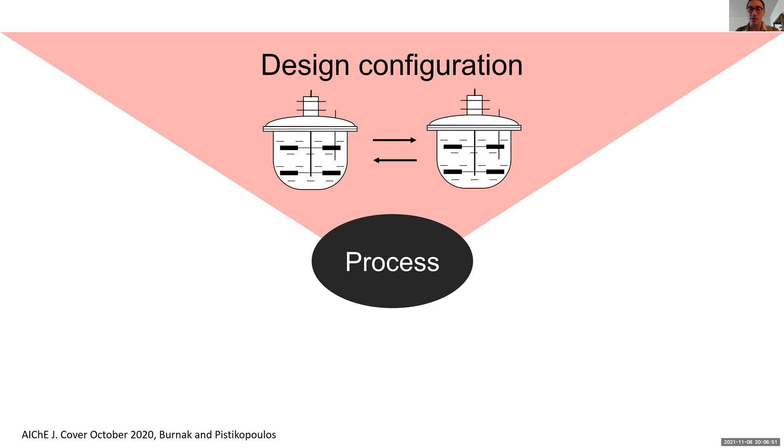So here we go. As I mentioned, most of my PhD studies revolved around processes, and of course any process will first start with the design configuration problem. By design, it will include the processing unit design and also the process flowsheet design—these are all part of the design configuration problem. When we do these designs, we want our process to be able to deliver the product specifications that we desire, and by doing that, we want it to be economically feasible, safe, and environmentally friendly.

Once we configure our design, the next step is to be able to operate it in an optimal fashion, and that is under the umbrella of optimal control. Most of us would know the more classical PID type of controller, but if we also need to handle more advanced constrained problems for optimal control, then we consider the optimal control problem, which chemical engineers are also highly engaged in within this domain.

Lastly, I also considered the scheduling problem, the process scheduling problem, in my PhD, which is not necessarily a traditional chemical engineering problem, but in recent years more and more chemical engineers are engaged in it. What I mean by scheduling is that let's say you have multiple tasks that can be delivered in multiple units—like multiple reactions, reaction 1 and 2, and multiple reactors. Allocating these reactions to the right reactor and sequencing these different reactions, along with timing—all these decisions fall under the scheduling problem.

Optimizing the schedule can also improve the efficiency of our problem, meaning we will be able to reduce our operating costs. Conventionally, we are all trained to isolate these problems, structuring them in a more hierarchical way. What I mean by that is we first build our design.

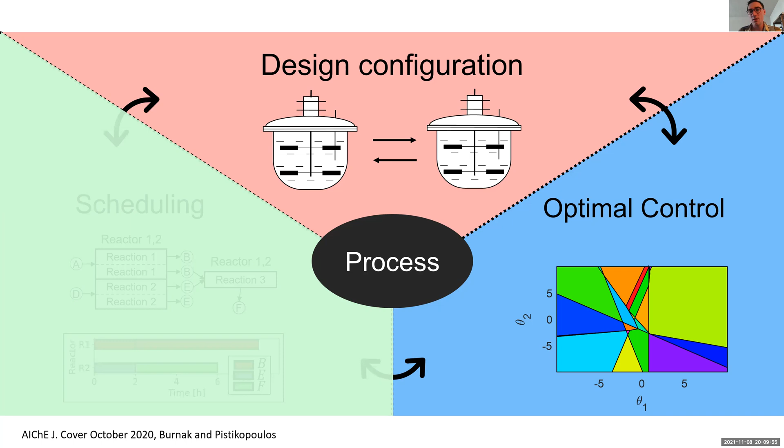And that was at the core of my PhD studies. Throughout my PhD, I focused on merging all of these decisions under a single optimization formulation. Today, I'm going to mostly focus on the integrated design and control problem, because I think it's more engaging for the audience, and I hope you will be able to follow that more easily.

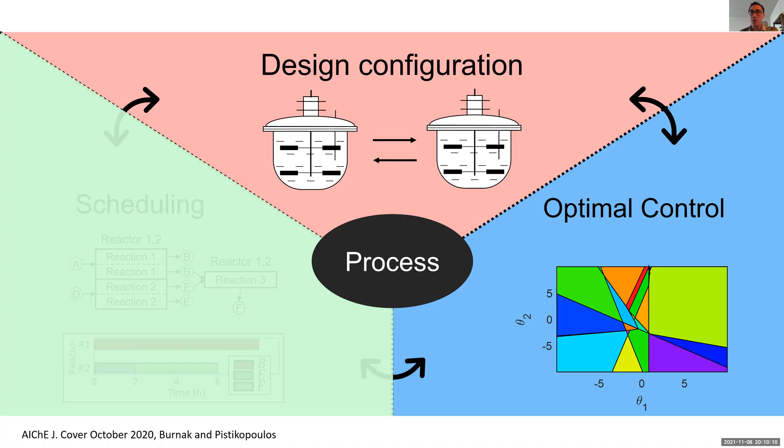This problem is not some unique problem that we came up with, or that either me or my advisor came up with. It has been studied in literature for close to almost half a century now, and it first started with investigating the steady state flexibility problem—what is the maximum external disturbance we can have in our process without any significant disruptions. That is the steady state flexibility problem.

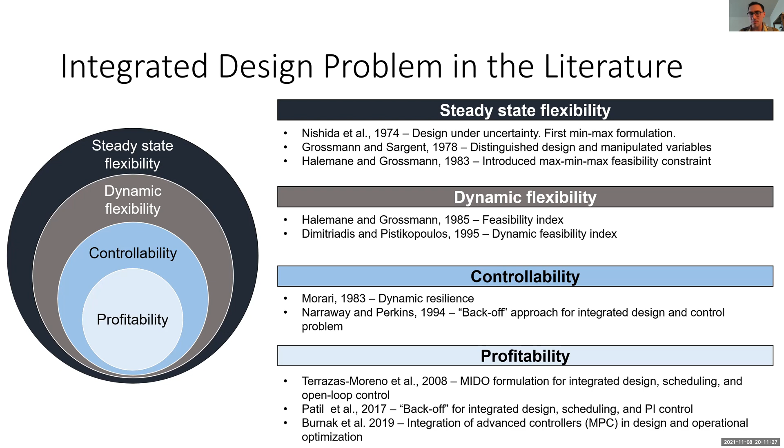Then the next step was the dynamic flexibility problem, which asks how we can transition from operating point A to operating point B in a more optimal fashion. Then the controllability problem: when we have these transition profiles, is that going to actually be doable by our controllers? And more recently, as our modeling and optimization tools improved, how can we do this in the most economically profitable fashion? So this is a brief summary of the literature.

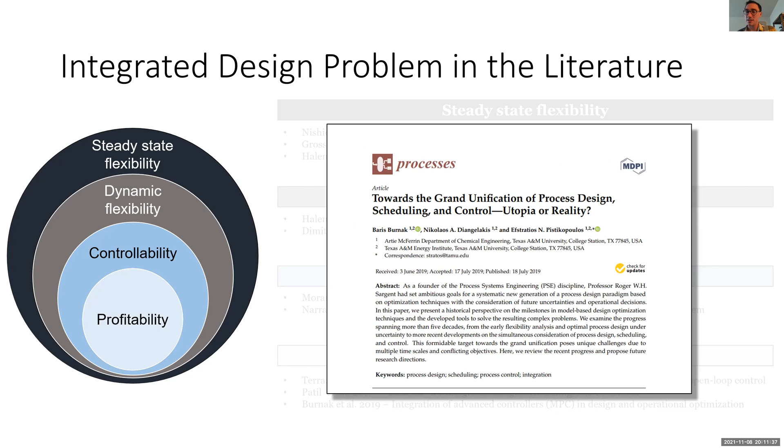About two years ago, we published a paper on this, and if you're interested, I can share this paper with you. Hopefully this gives you an idea of the problem that I researched.

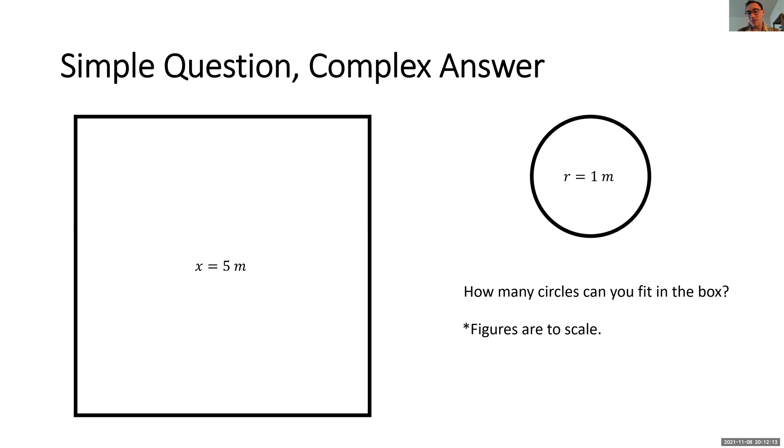Now I'm going to briefly talk about the more modern mathematical optimization tools. I would first like to motivate you with a very simple question, which can be very complicated to answer. If you were to ask how many circles you can fit in this box, how would you approach this problem?

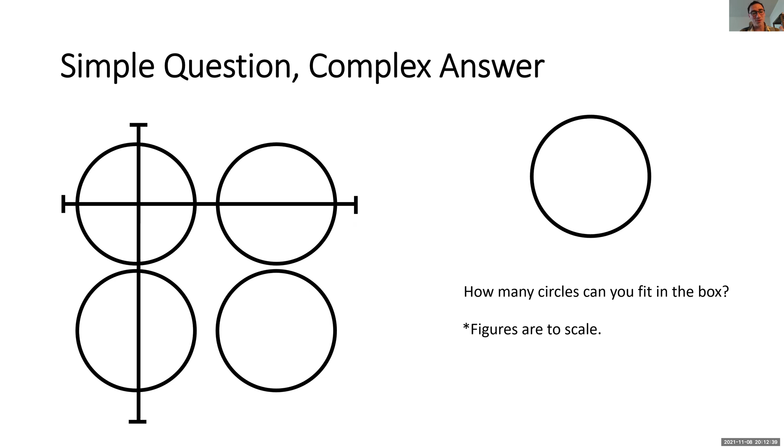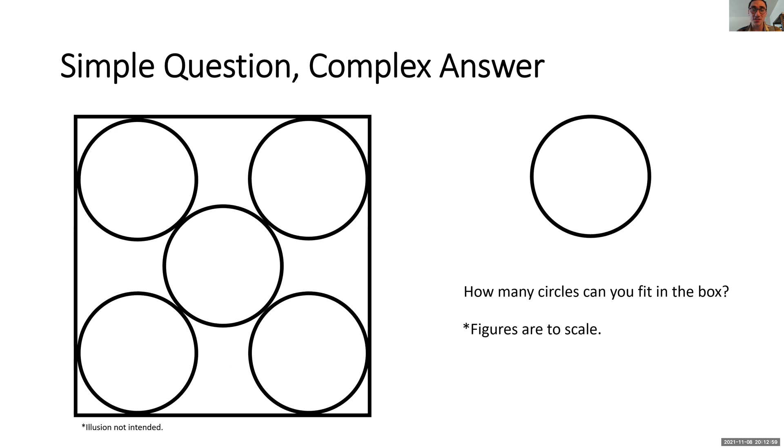As engineers, we can decompose the problem into constituent subproblems to tackle it more easily. So we can first consider one dimension: we can fit 2 circles in one dimension, and in the second dimension, another 2 circles—so 2 by 2, that means 4 circles. But obviously this is too good to be true, and I deliberately chose these numbers. It's actually going to be 5 circles. My message here is that we cannot always just decompose the problem into its subproblems—if we do that, we may miss some synergistic effects between different dimensions.

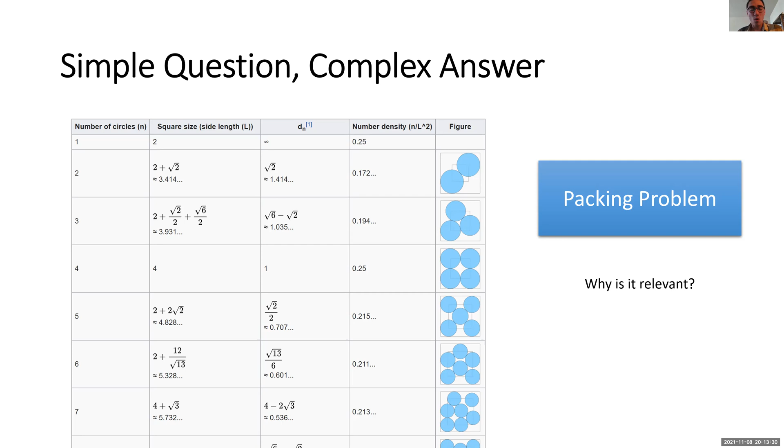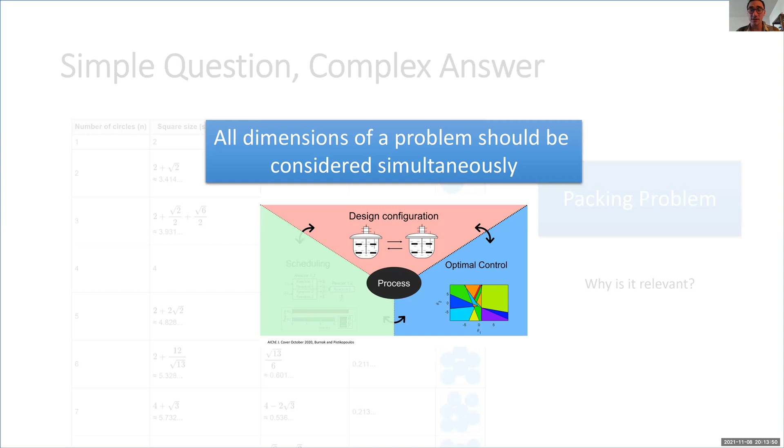Why is this whole packing problem relevant to our problem? Because what I want to show you is that if we decompose our whole process design and operational optimization problem into subproblems, we may miss some key points that would actually improve our processes significantly. That was the whole message I wanted to give.

Now, how are we going to make use of these synergistic effects? How are we going to capture this? That is going to be by mathematical optimization. Let's say, as an engineer, you are able to come up with a cost curve as a function of our process variable—let's say it's temperature—and you know what our cost is going to be as a function of temperature.

Now the question is, how are you going to find the best operating conditions, which is obviously going to be this X, but how are we going to find this? Well, we can simply discretize our whole domain, evaluate the functions, compare the results, and use the least expensive one, and we can operate at that point.

The problem with that is, first, it is computationally expensive. If you have a large complex process, you may not be able to evaluate all of these different points. But more importantly for me is that this approach does not guarantee any optimality. We will never know if we try further and further if we're going to get any better or not. We have to be happy with whatever we have.

As opposed to this approach, mathematical programming provides a systematic approach to compare all of the possible feasible solutions, and it will just return the absolute best solution.

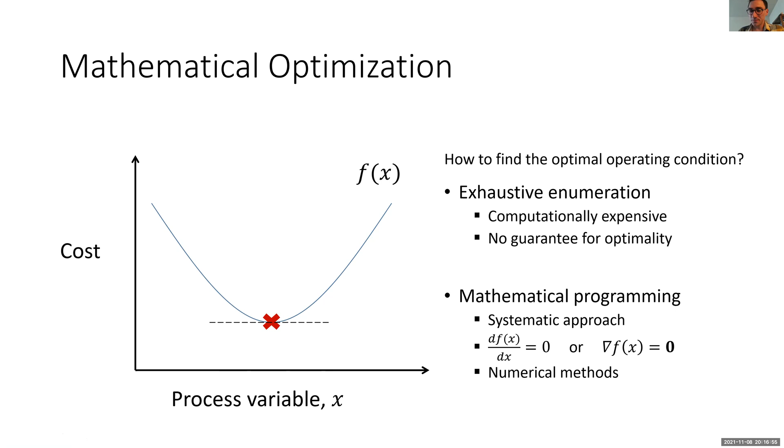Now I'm going to show you some complications we can have in constructing these kind of cost curves. It is very possible that not the whole domain can be feasible for us.

Someone can say that they don't want the temperature to be above a certain value and less than a certain value, because the reactor can explode, or side reactions can start dominating the reaction. So we may want to avoid these regions. If this is the case, taking the derivative and making it equal to 0 won't work for us. But you can still see the allegory: if I drop the ball somewhere within this feasible space, it's still going to land on this X mark.

Similarly, we can have inequality constraints. We can include these in our models, in our optimization problems. We can have equality constraints too, all sorts of thermodynamics and mass and energy balances fall under the category of equality constraints.

Our cost function doesn't have to be convex. It can have multiple local optima. As you can see now, if I drop the ball somewhere in the middle, it doesn't necessarily have to land on my global optimum. That requires more advanced types of approaches for these kind of problems.

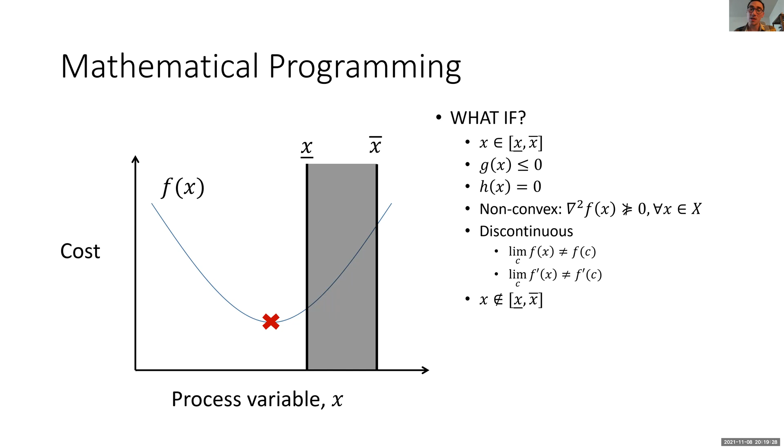Also, somebody can tell me that I'm not allowed to simply operate within a certain range, and that can create a different kind of discontinuity. I'm showing this because in real problems, we can have all of these, or a combination of different complications. But mathematical programming approaches systematically approach all of these problems, and at the end, we provide a theoretical guarantee that the solution we find is globally optimum.

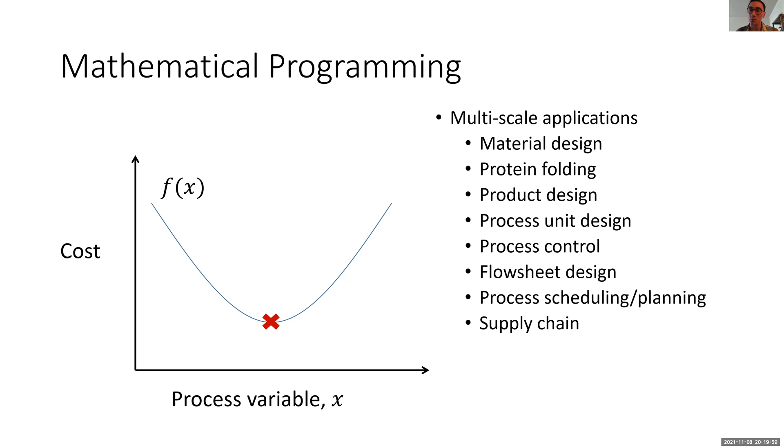This kind of approach, mathematical programming, is not only valid for process design or control problems. It can span all the way from nano or micro scale problems like material design or protein folding, all the way up to process scheduling, planning, or nationwide or worldwide supply chain problems. So this is a very powerful tool to find the optimal solution for our problems.

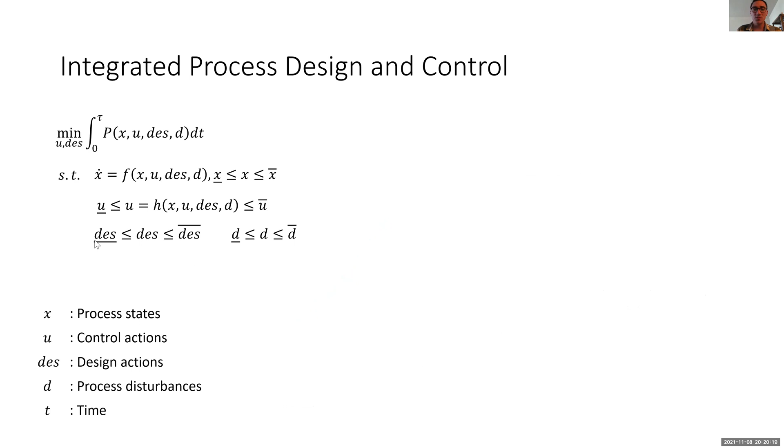With that knowledge, I'm going to show some mathematical formulation for how we can actually formulate our integrated process design and control problem. The notation is usually like this: we want to minimize an objective function, and this objective function is usually the combination of our capital and operating costs.

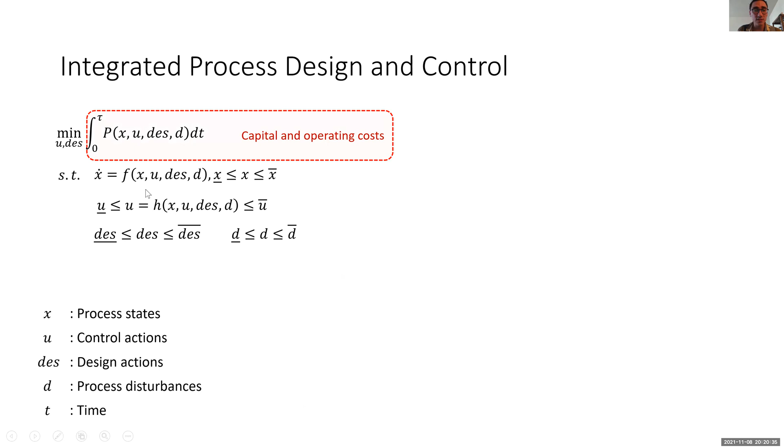The capital cost is usually the annualized capital cost. This objective function is subjected to our process dynamics, which can include mass balances, energy balances, reaction kinetics, and thermodynamics. Now, because this is the integrated design and control problem, we also want to include the process control problem, which can include a PID type of controller, the classical controller, which comes in an explicit form, U equals AX plus B.

Here we see the first challenge: when we take this PID controller and implement it in a design optimization problem, which is typically a static problem where we just want to find the best steady state solution for our design, now we have to discretize our problem, because now we have a dynamic problem. If we want to include the process control problem, that means we have to include the time component into our formulation, and with that, we have to discretize the whole domain, and that will create a large scale problem.

And the problem is non-convex, which I described earlier. This non-convexity mostly comes from our reaction kinetics and thermodynamics. And the dynamic optimization problem is because our objective function and our dynamic model are again dynamic, and that is mostly because of the process control aspect of it.

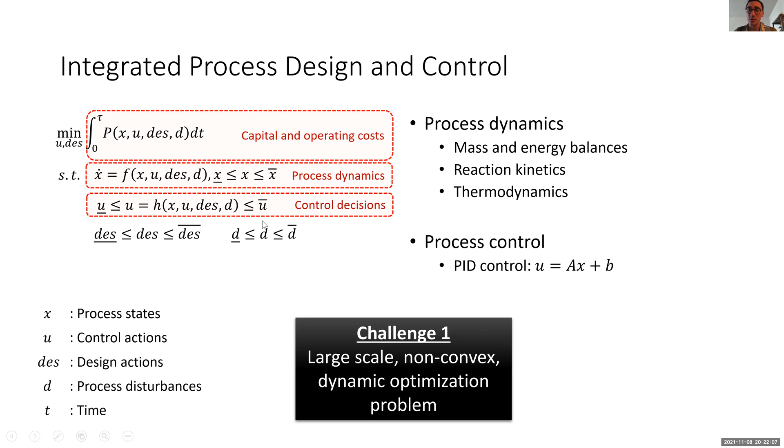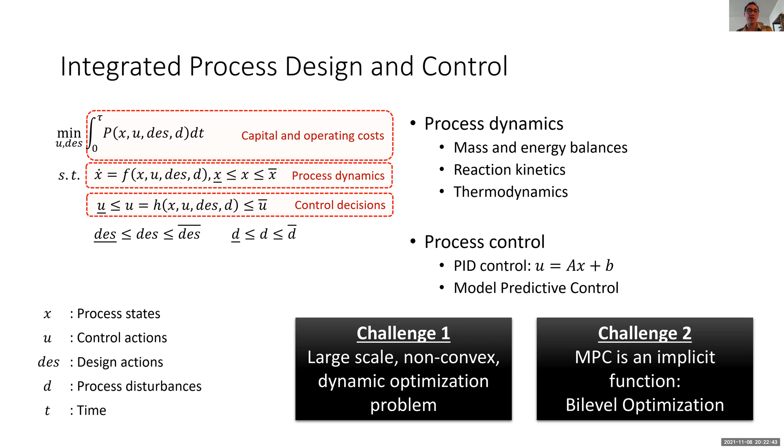But now another challenge is that if we want to use more advanced types of controllers, like model predictive control, also known as MPC, now the MPC also comes as an optimization problem. And when we incorporate that in my overall optimization problem, it's going to give me a bi-level optimization problem, and we don't have an elegant way or commercial solvers to solve this class of problem. This was mainly my research in my PhD.

For the uninitiated, model predictive control more or less looks like this. It has an optimization form, and it is operated in a rolling horizon fashion. So at time k, or time t, we solve an optimization problem. We obtain an optimal trajectory for our manipulated variables in such a way that it's going to take our outputs closer to the reference trajectory.

After we apply the first control action, we move on to the next time step, k+1, and we solve the same optimization problem again, get the whole trajectory, and apply the first one. We keep doing that, and that is called the rolling horizon strategy.

What I would like to show here is that in the objective function, we want to track a reference trajectory. We just minimize the difference between our set point and our expected outputs. This objective function is subject to our process dynamics, and all the variables are bounded.

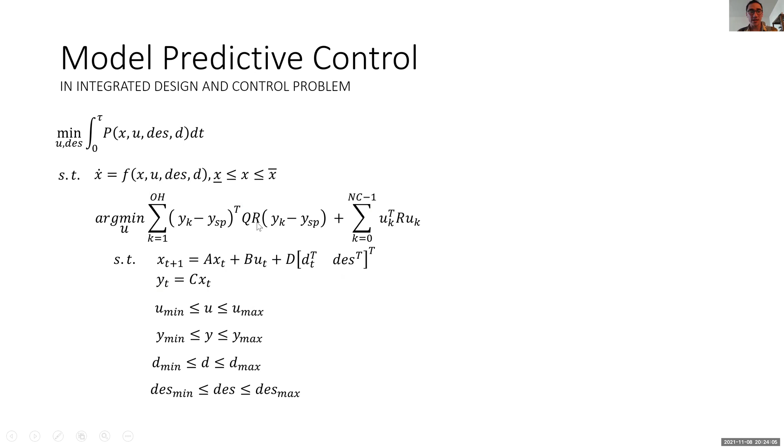Now when we get this model predictive control and integrate it into our dynamic design optimization problem, we obtain this ugly looking optimization problem. The main challenge here is that we don't have an elegant way to solve this kind of bi-level optimization problem, because now this has an implicit form due to this optimization within an optimization.

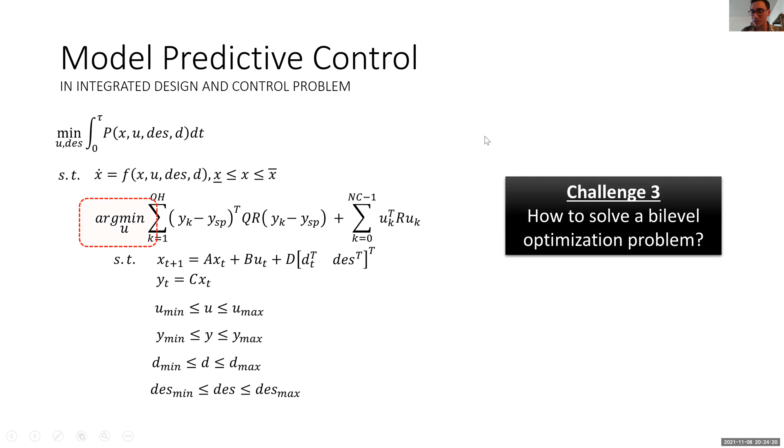In my research, how I tackle this problem is that we can take this model predictive control and reformulate it by treating some aspects of the MPC problem as parameters. What I mean by that is I can take the initial states of my problem and my measured disturbances, or the set points that I want to reach, and treat all of them as uncertain parameters.

So now when I solve this problem offline, I can have the entire range of optimal control decisions as a function of these parameters. And when I solve this explicit form, it's going to give me the exact same optimal solution as the MPC would give me.

We have a toolbox, the parametric optimization toolbox, which was developed in our group, and I'm one of the contributors of this toolbox. We can use this to make this reformulation and solve this offline MPC problem.

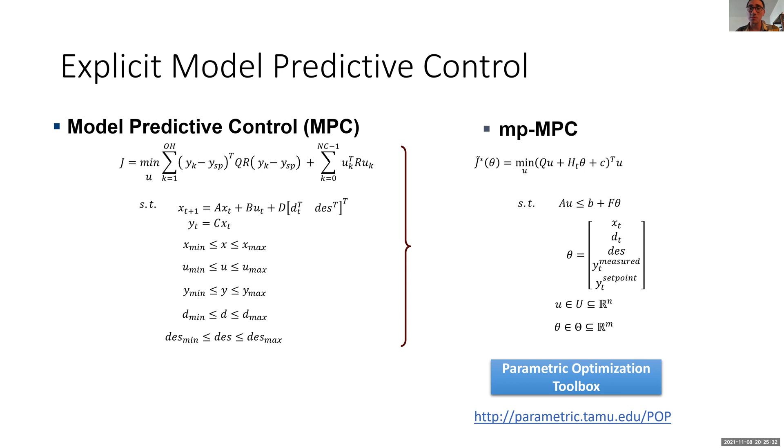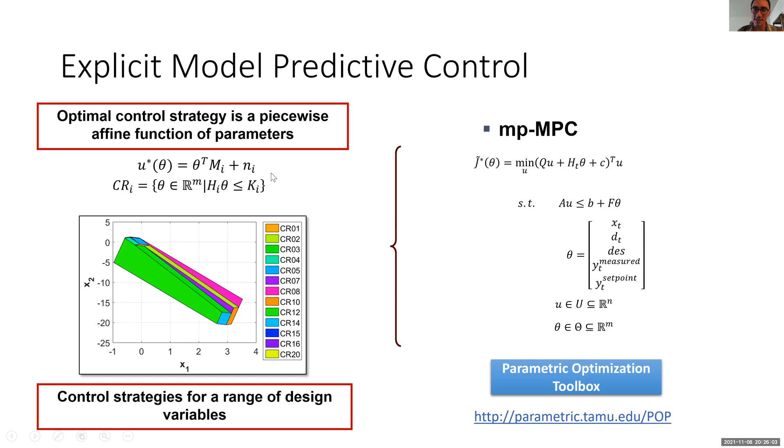Now when we solve this problem, we're going to obtain these maps of solutions. This is basically just a lookup table. All we have to do is, whatever the parameter realization is—let's say we know the temperature now, and we have the set point on the second axis—we locate where the parameter realization lies, and we evaluate the corresponding optimal control action. That is going to give us the exact same decision as the MPC control.

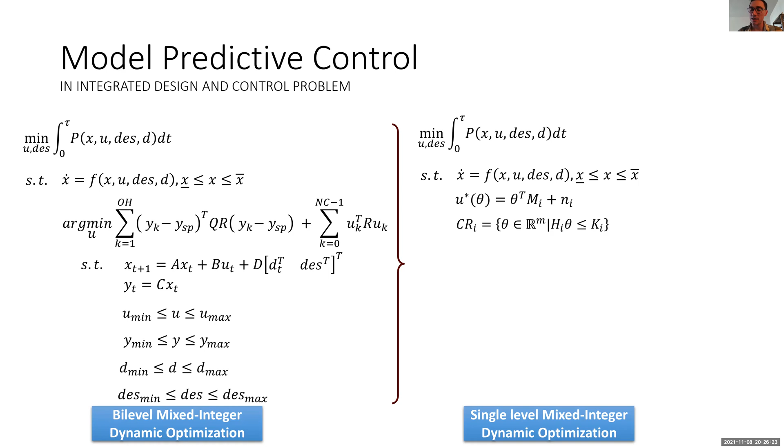Now we can use this approach on this bi-level mixed integer dynamic optimization problem, and we can convert this into a single level mixed integer dynamic optimization problem for which we actually have commercial solvers. So we can put this in a commercial solver and obtain a solution. Now I'm just going to show you how this applies to a chemical engineering problem.

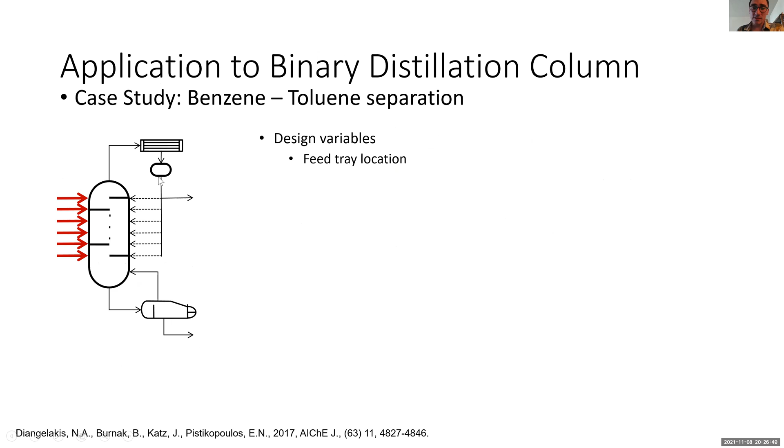So this is going to be a benzene-toluene separation distillation column. The decision variables are first the design variables. We want to find the feed tray location, the reflux tray location, the column diameter, and the condenser and reboiler sizes. So these are my design variables.

And we consider a disturbance profile, a feed composition, and we're going to be solving for the entire range of this disturbance profile. So it's not just for one disturbance, but because we have the capacity to solve the MPC problem for the entire range, I can include this range of the disturbance in my problem. Also, my manipulated variables, or control variables, are the reflux and vapor flow rate. These are for the MPC. By manipulating these, we want to control the top and bottom purity of my distillation column.

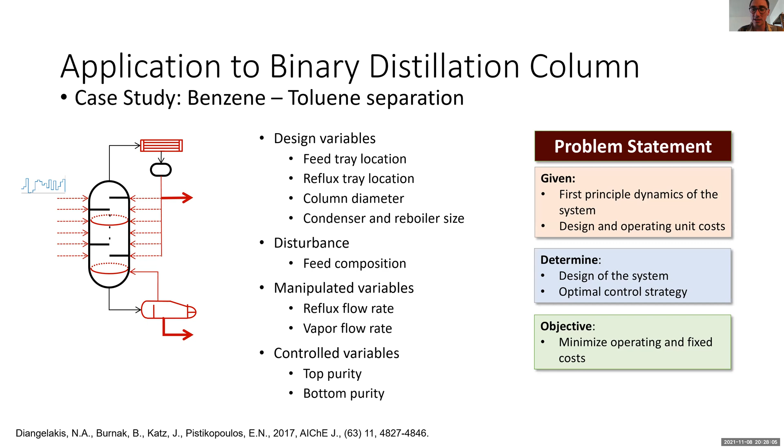To summarize my problem statement: I am given the first principle dynamics of the system, so I can construct my first principle model. I'm assuming I'm given the design and operating unit costs, and I want to determine the design of the system and simultaneously the optimal control strategy, while minimizing operating and investment costs. We're all familiar with the distillation column design equations - we have the mass balances, the energy balances, all the thermodynamic relations, and the tray specifications.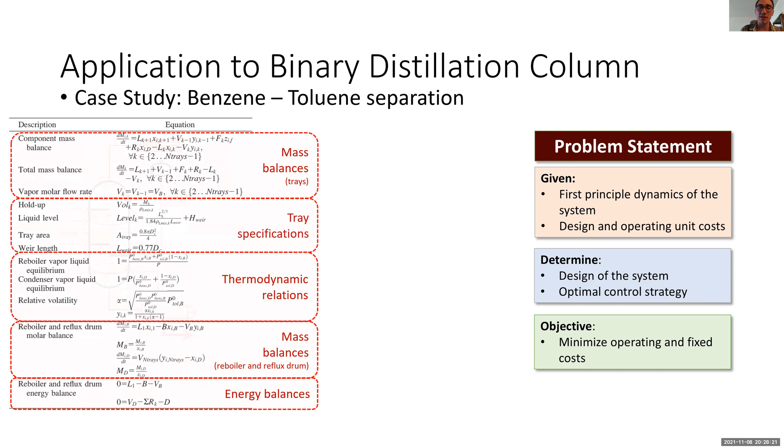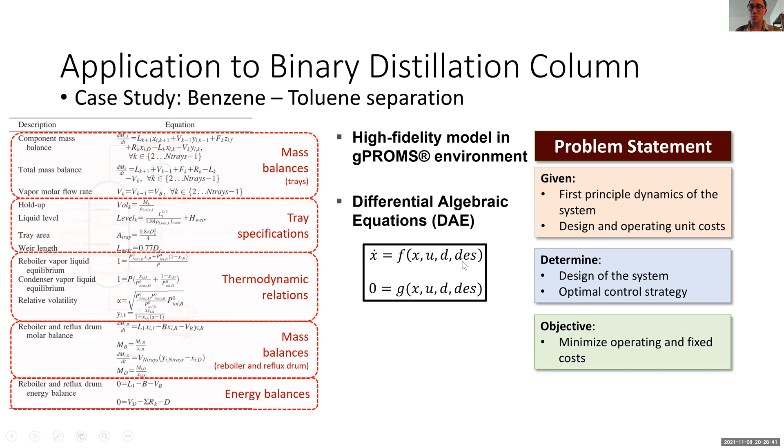And the modeling for this problem was done in the gPROMS environment. If you're not familiar with the software, it's just like ChemCAD or Aspen HYSYS, very similar to them. This whole system of equations actually gives us a differential algebraic equation system, which looks like this because of this differential term.

Now we can follow a certain procedure to develop my explicit model predictive controllers, which come in explicit form, and I can take them and incorporate them into my original high fidelity first principle model. So it will just be a bunch of equations added next to my first principle dynamic model. And I can do this reformulation again by following parametric programming.

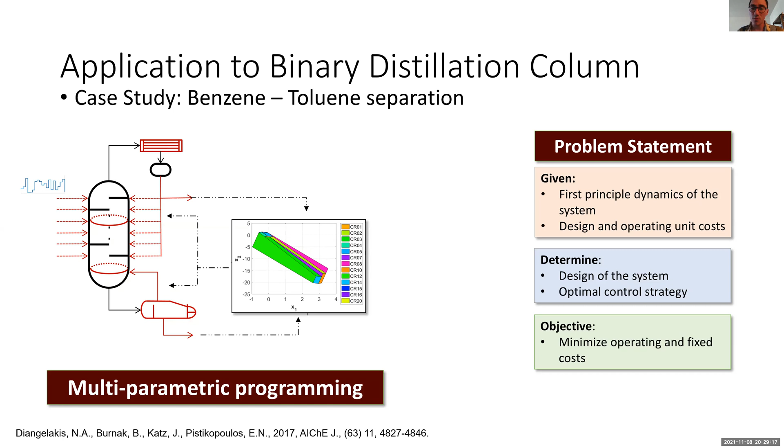When we follow this whole procedure and solve this problem simultaneously, we actually observed an improved efficiency of 17% compared to the more traditional sequential approach, where we first built the design completely blind to the process control. The reduction in cost mostly comes from the size reduction in heat exchanging units and the improved energy efficiency.

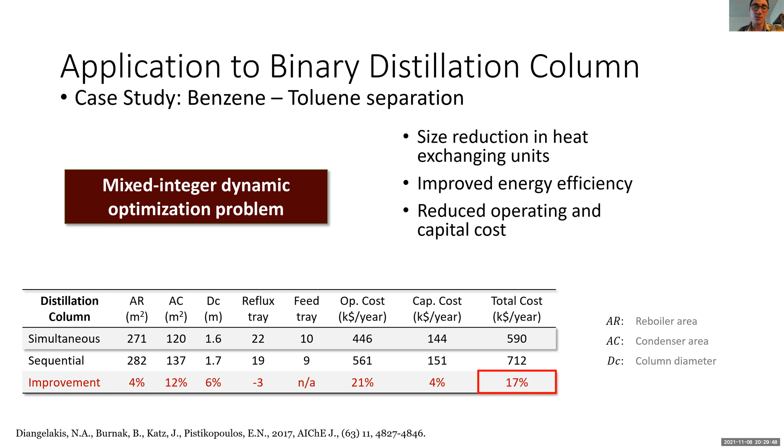This whole concept is what my research revolves around - using multi-parametric programming to get explicit and offline expressions for the control and scheduling problems. At the end of my PhD research, we published a book about these concepts, where we investigate them in further detail. I would be happy to discuss this if you're interested.

Now, lastly, I'm going to briefly talk about my professional experience here at Phillips 66. Unfortunately, I couldn't get the necessary permissions to disclose what I would like to show, so I apologize for that.

But what I can say is, by using these mathematical programming and mathematical modeling approaches, I was able to model certain assets of Phillips 66, multiple assets there, and we observed a 10 to 30% reduction in costs. We were also able to reduce carbon dioxide emissions up to 30%, which is very promising for us and is getting a lot of attention across the company. So I'm very happy with where this is going, and there are a lot of opportunities for implementing these kinds of approaches across the company.

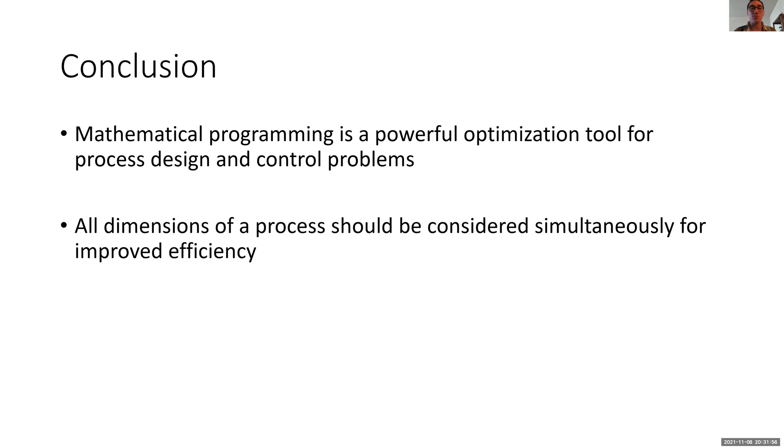To conclude my talk, I would like to say that mathematical programming is a very powerful tool for design and control problems. And if we can achieve merging or integrating these design and control problems, or different dimensions of our problems, we can improve the efficiency of our processes.